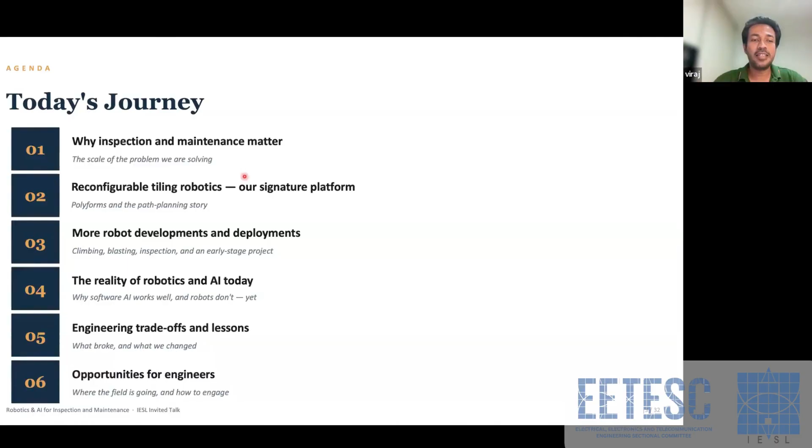Why do inspection and maintenance matter? Currently there are a lot of buildings and industrial infrastructure that require frequent maintenance and inspection. Globally, infrastructure maintenance expenses are more than a trillion dollars annually. Maintenance cost is almost 60 to 80% of the total life cycle cost of an industrial asset like a building or machinery.

Also, some of these maintenance tasks are high risk. For example, to inspect facades, people need to use ropes or gondolas to climb high-rise buildings and do the inspection task, but those are a bit dangerous and might lead to safety issues. On the other end, when inspecting something like a fuel tank of an aircraft, those are highly confined spaces, and it's very difficult for humans to go through and inspect them.

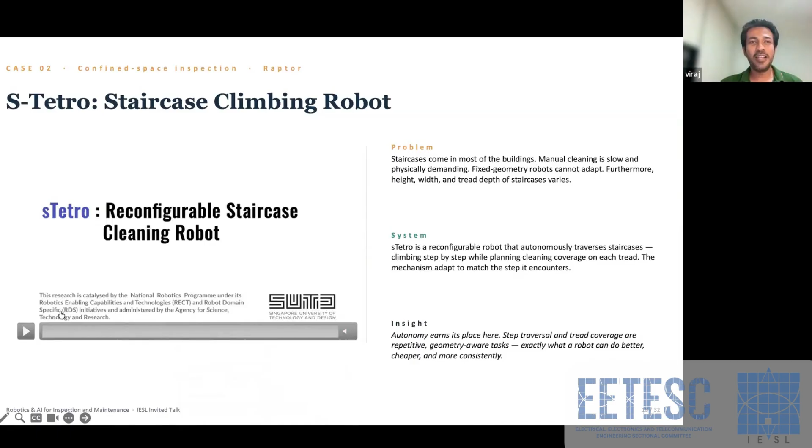sTetro is a staircase climbing robot. In every multi-story building, even if it has a lift, it will definitely have a staircase. Cleaning this staircase is also a problem because cleaners need to climb and clean each step. So we developed a robot called sTetro, a staircase climbing robot, initially intended for cleaning the staircase.

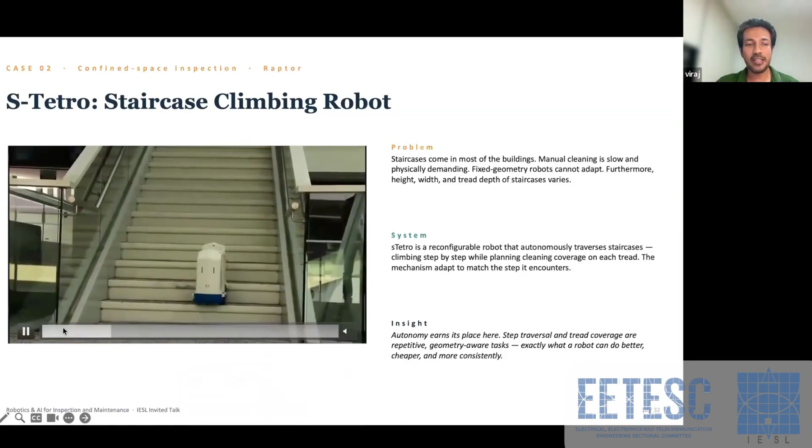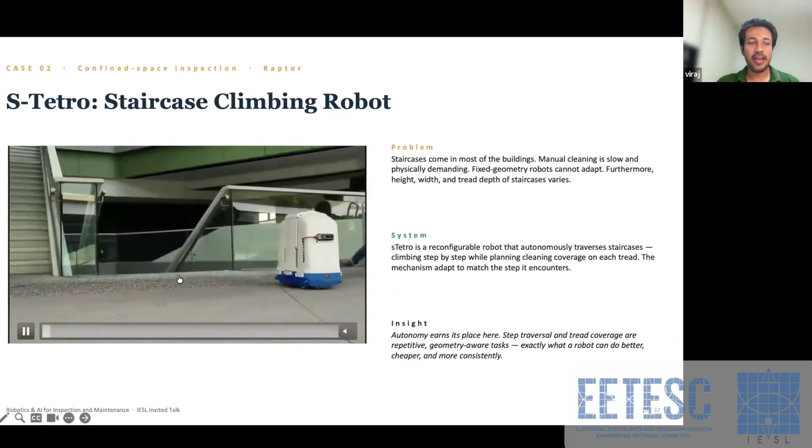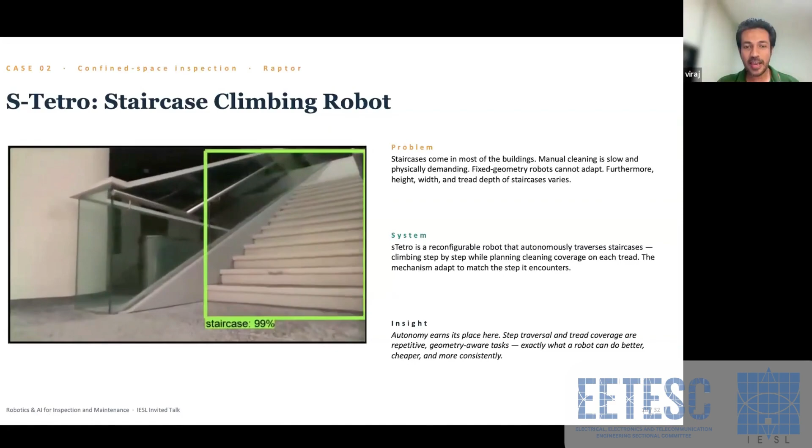It is embedded with a vision-based detection method, as you can see, it can identify the staircase using this method. After identifying the staircase, it detected the step height, riser height, and step size using its sensors. Then it used this reconfigurable mechanism to climb the staircase. As you can see, after climbing the first step, it does a sideways movement to clean it.

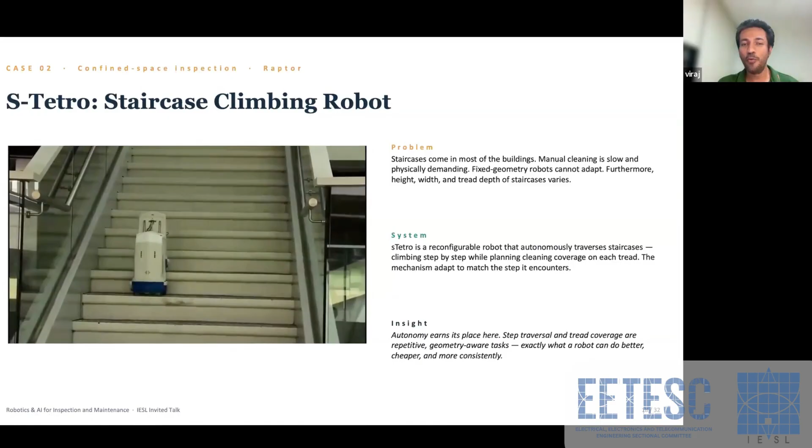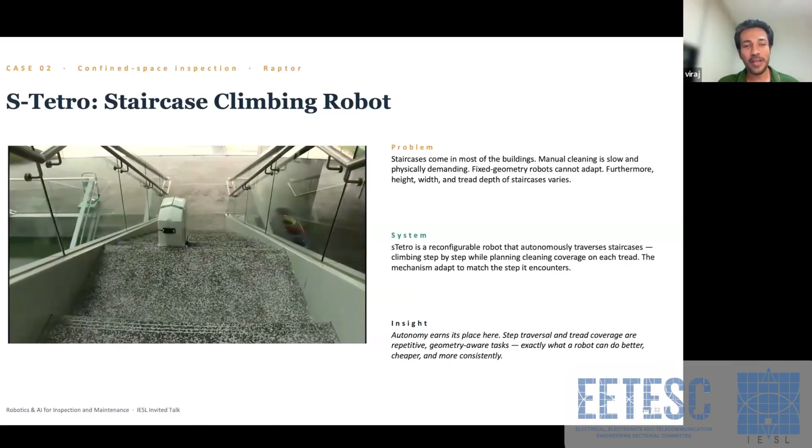It consists of 3 blocks. By changing, one block is on the first step, then the second block is lifted, then finally the third block, and likewise it can climb the staircase. This is another version - in the initial version it could only climb but not descend the staircase. This version can do both climbing and descending.

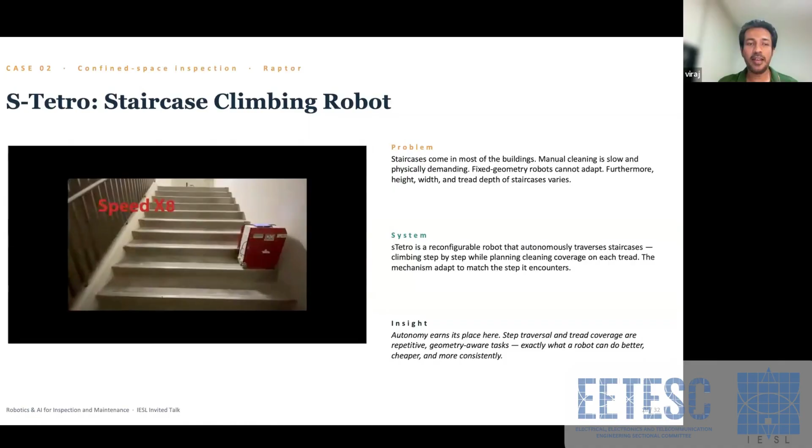These robots are equipped with LiDAR sensors which can detect the steps and measure the step size and riser size, then decide how much one block should lift and how much the other should move forward. Likewise, it can continuously descend and climb through these steps for cleaning applications.

Apart from cleaning, we have tried using these robots for goods carrying, especially in construction situations. For building maintenance, if we want to carry stuff to the top floor, using the normal passenger lift is sometimes difficult, so we tested how we can carry heavy loads using these kinds of robots.

The main insight is that for this kind of robot, the most important thing is that it needs to identify the steps clearly and change steps properly. Otherwise the robot might topple down, leading to dangerous situations like falling onto a human. So the AI and autonomy technology should be robust in detecting these steps and staircases properly.

We also need proper control algorithms that avoid toppling of the robot. So finally, the use of this kind of robot can improve cleaning efficiency and typical day-to-day building cleaning tasks.

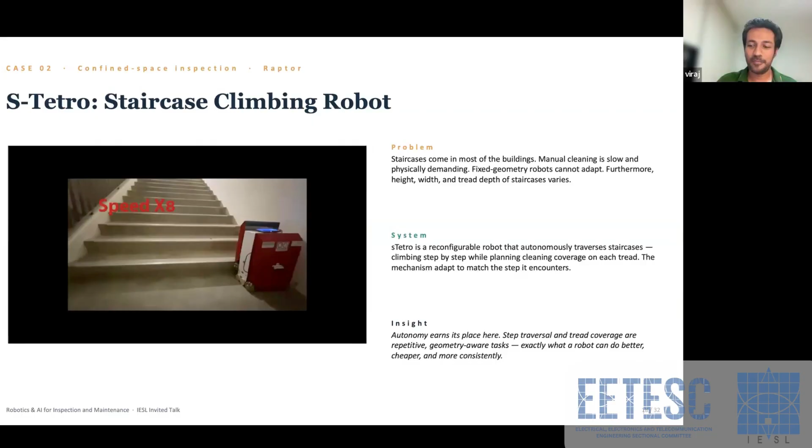I'm going to discuss some of our robot development targeted for high-rise facade inspection of buildings as well as aircraft fuselage inspections. We have developed several robots for inspecting surfaces where humans typically need to climb to do cleaning or inspection tasks. One drawback of human-based cleaning or inspection is safety, because humans need to climb through ropes or using gondolas, which is not safe. Also, finding labor is expensive and sometimes difficult.

So these robots, the first one we call Mantis. It is deployed for glass facade cleaning. This robot uses, as you can see here, three modules like this. Each module has a vacuum suction mechanism. Because of the vacuum suction mechanism, it can attach to the surface like this due to the vacuum pressure.

One of the main advantages of our robot over existing robots with a single module: if we use a single module robot, typically in a glass panel like this, we have separators based on aluminum or metal. Those separators have some thickness compared to the glass. So what happens is if we use a single block, it cannot move through this separator.

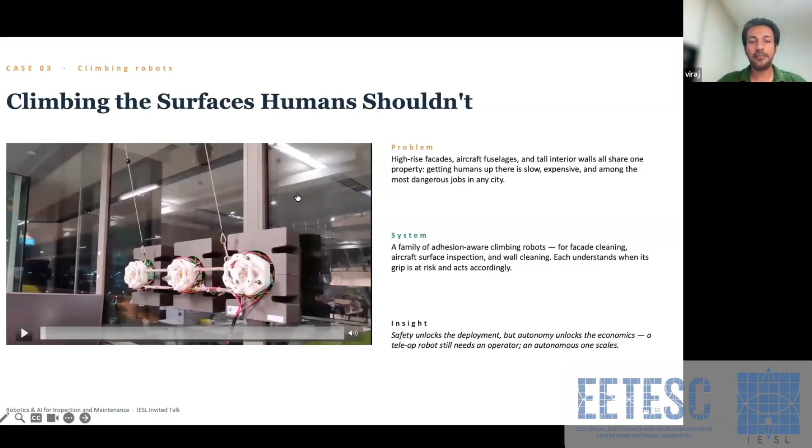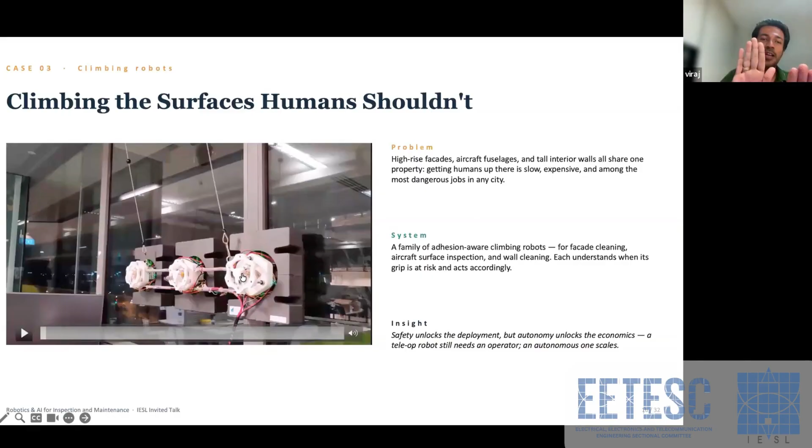So here we use this three module mechanism, where initially, when it's in a glass panel, all three modules are properly attached to the glass panel. When it encounters a separator like this, for the first module, we switch off the vacuum system and use a screw mechanism at the back of the robot to lift it. The other two blocks are still attached to the glass frame. Then these two robots start to move toward the right, so this one will pass through the separator, as you can see in this video.

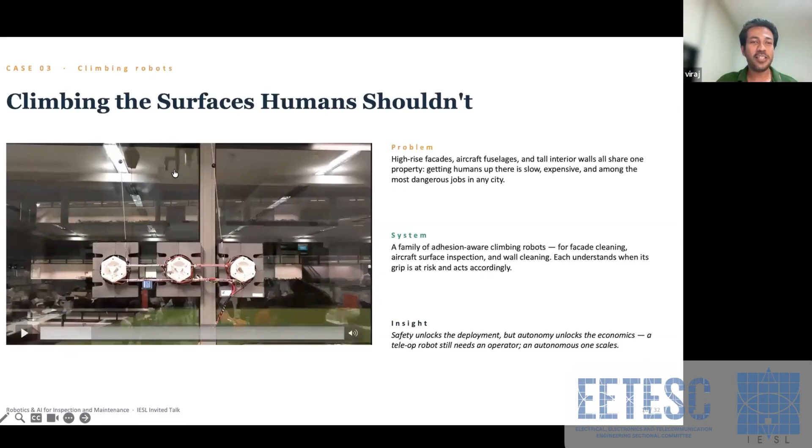Here please note that this robot is fully attached to the glass frame, and these two ropes are only for safety purposes. Even if we remove these ropes, the robot will still stay on the glass, but for safety regulations we have to always use safety ropes when using climbing robots.

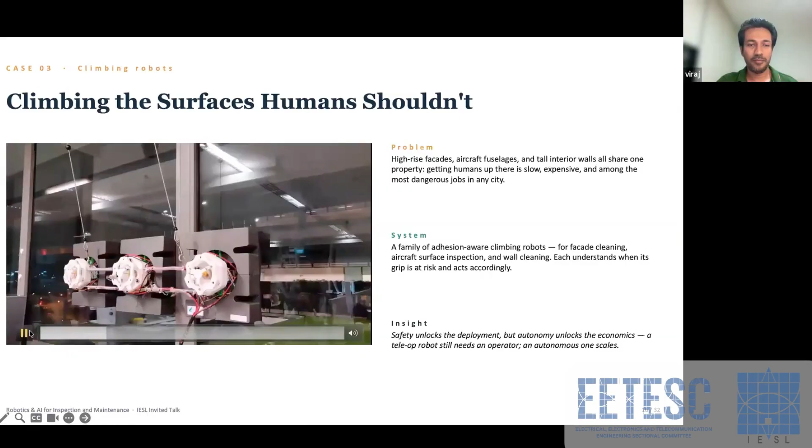As I have explained, now the second module moves to the next block and attaches to the glass panel. Then the third module will be moved. Likewise, we can use this mechanism to move, first cleaning one frame, then moving to the next frame and cleaning it, and so on. This way, we can use this robot to cover a large area, and it's also equipped with an AI-based method to identify the frame and make autonomous decisions for transitioning from one plane to another.

Here you can see an aircraft fuselage inspection robot. This robot's main advantage over other robots is that it has a reconfiguration mechanism, where it can change between two different planes. It can operate on the wings, and then move to the fuselage using this reconfiguration. We conducted this at one of the airbases in Singapore, and I cannot remember the exact model of this airplane.

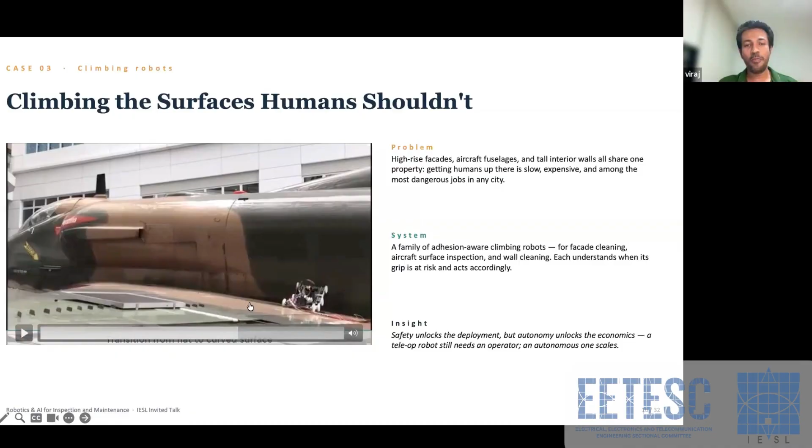As you can see here, this reconfiguration allows the robot to move from the wings to the fuselage, and then it can attach to the surface and climb on its own.

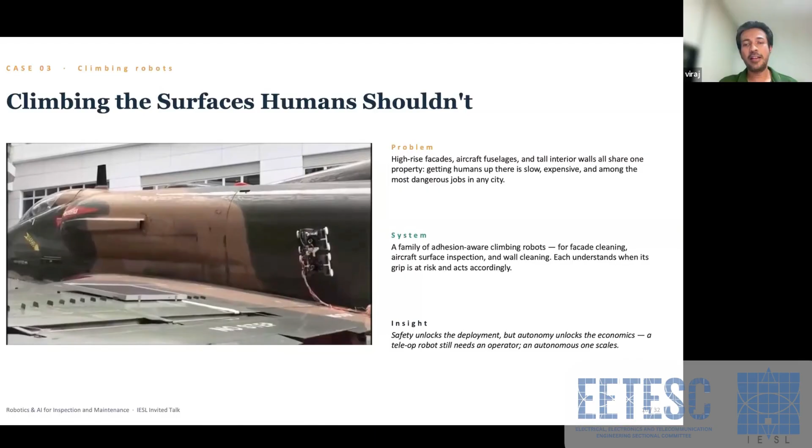We have developed vision-based inspection modules for these robots. As I recall, we used a YOLO-based aircraft crack detection method. We incorporated it with this robot, and after running the robot, we can identify where the scratches are on the surface of the aeroplane.

One of the main points to highlight is that safety is critical for this climbing robot. But the problem is, if we try to ensure safety, autonomy sometimes has reliability issues, so people use teleoperation instead. Some of these systems are teleoperated too. But the problem is if we want to scale, we cannot always have a person operating these robots, so we need an autonomous system that can automatically decide, take actions, and if it's losing adhesion, autonomously identify that and take safety actions. Therefore, autonomy is essential for scaling this.

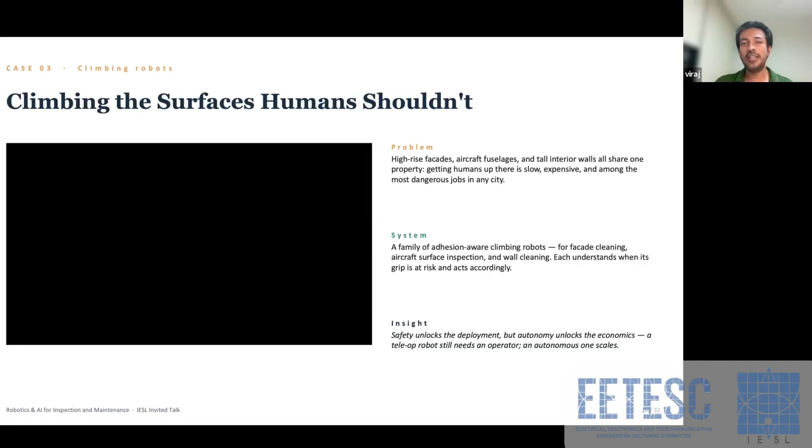So we have developed methods that can identify if there is a vacuum leakage, and if there's a vacuum leakage, there is a risk of falling. We have developed such methods for identifying vacuum leakages and taking precautionary actions in the robot's operation.

Okay, the next one is another type of climbing robot. This one we developed for ship hull maintenance. Typically, when ships are at sea for months, there will be biofouling and sometimes corrosion. So after several months at sea, they take it to docks and remove that biofouling and also strip paint using hydroblasting and sand blasting.

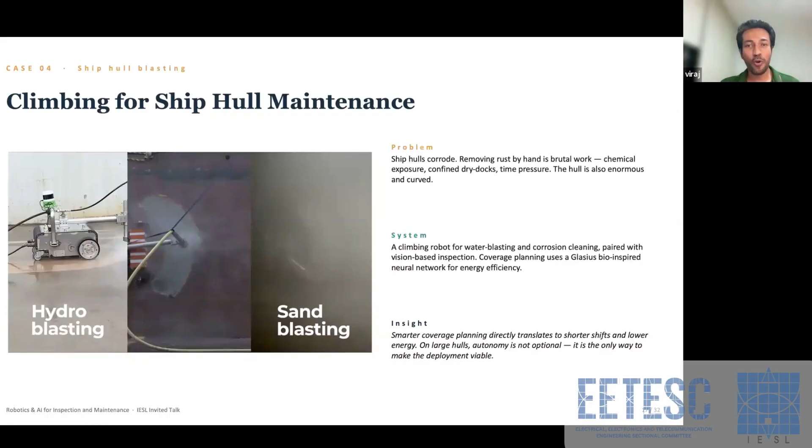This robot we call the hydroblasting robot for ship hull maintenance. So you can see the video.

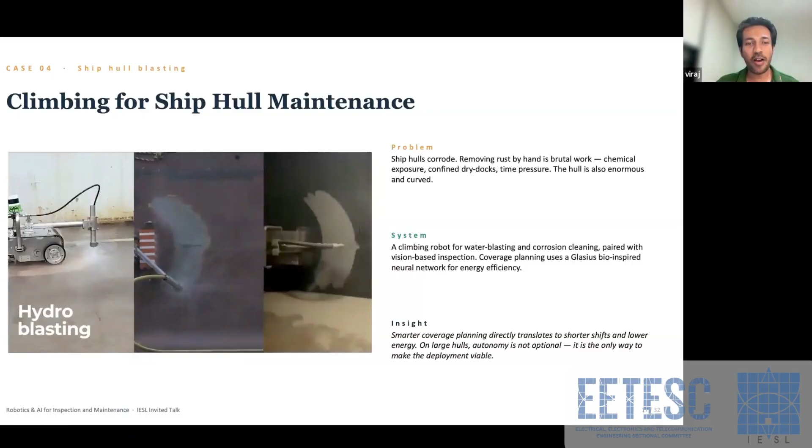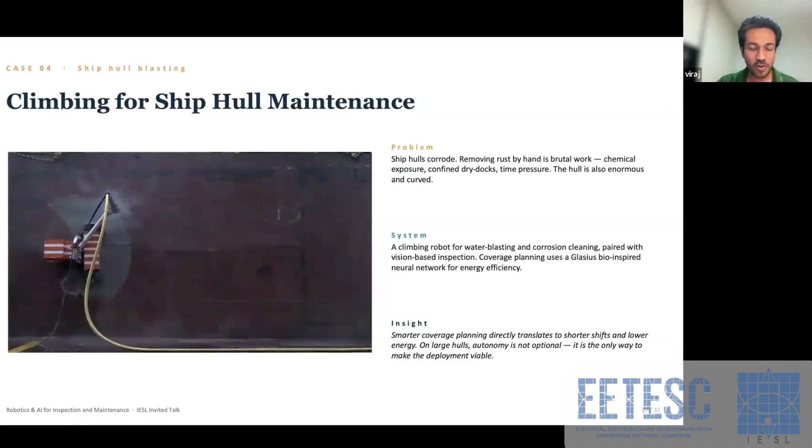So this is hydroblasting. We have a high pressure hydroblasting device fixed to the robotic arm, and here you can see paint removal in one of the dockyards, I think Tuas dockyard in Singapore. So this is the situation of biofouling in a real ship, and this is the ship surface.

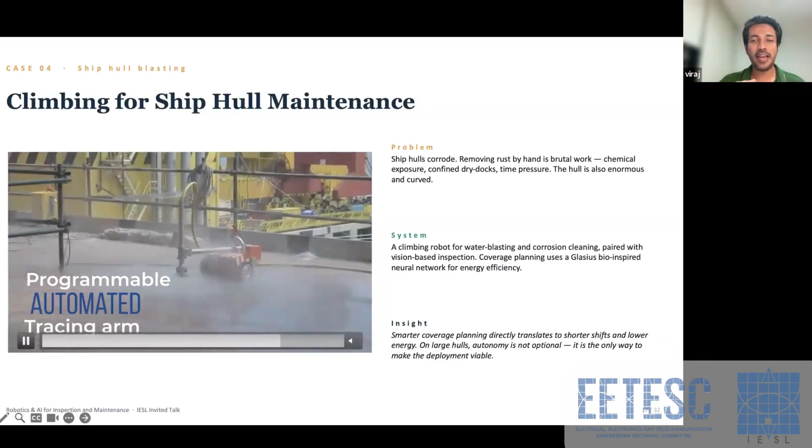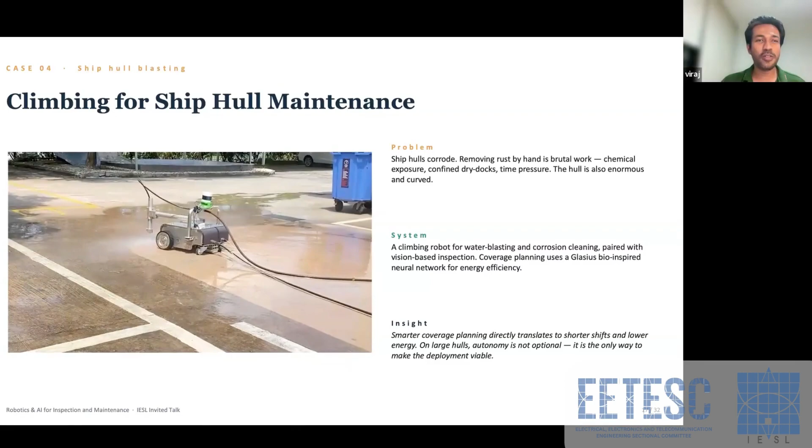So we use a magnet based on neodymium in the wheels of the robot. This magnetic adhesion helps us attach the robot to the ship surface. In the previous climbing robots I explained, we used vacuum suction or thrusters. But the main problem is, if we use vacuum for these kinds of robots, and with hydroblasting, if we blast sand or water in this way, there will be repulsive forces in this direction, and typically the vacuum attachment might not be sufficient for stability.

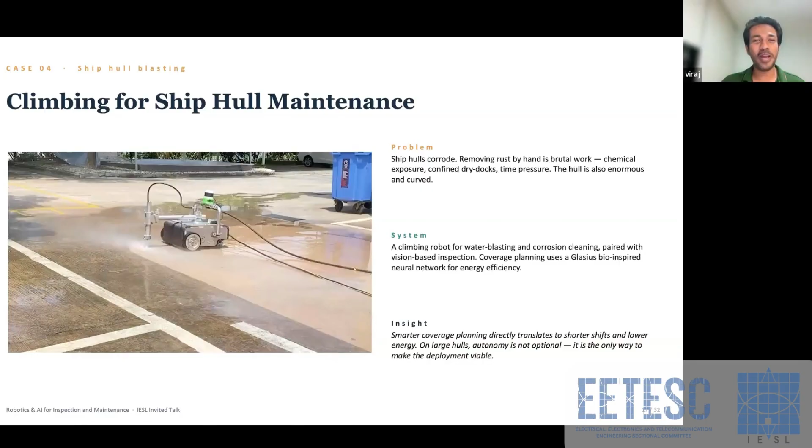And the other thing is, ship hulls are made from iron, which is a very good ferromagnetic material. So in the wheels of this robot, we use magnets, which allow us to attach the robot to the ship surface, and then we have this robotic arm that can move like this.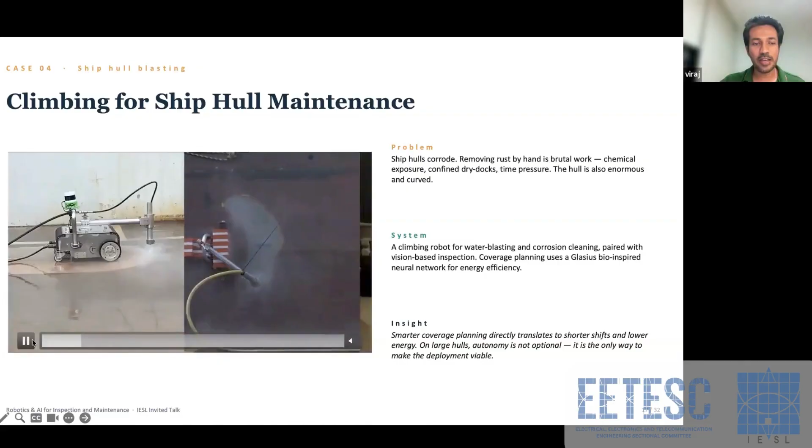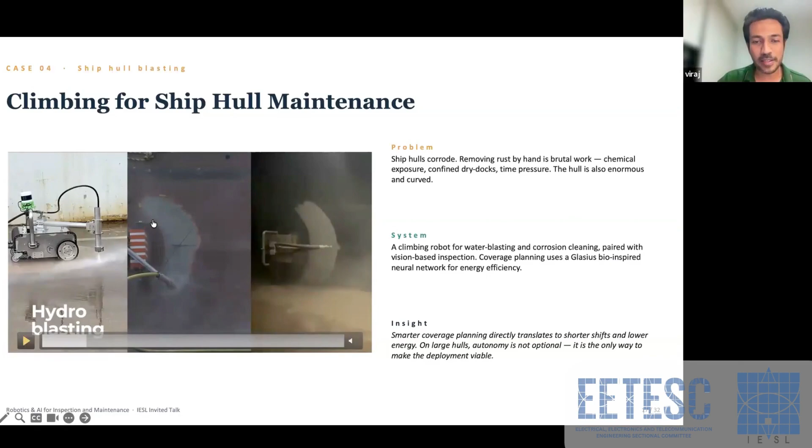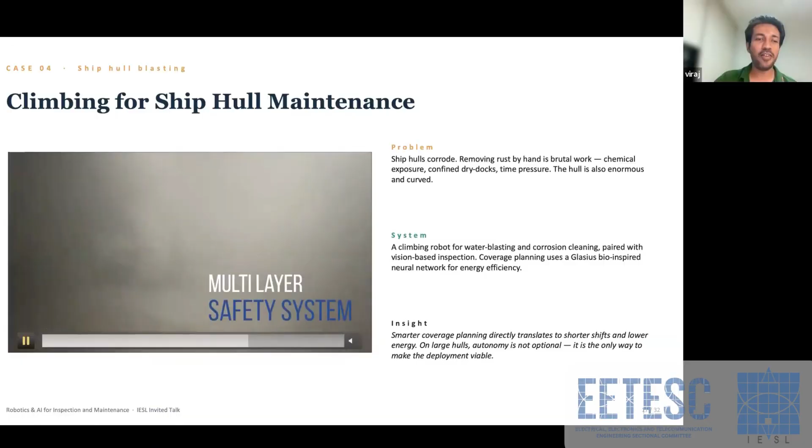The robot will move forward and then in a zigzag pattern to cover the area for blasting. We have also tested it for sand blasting, which, as you can see here, is a very tedious, unhealthy and risky task for human labor.

They need to wear PPEs, and those sand particles pose a high health hazard. So the use of these kinds of robots can reduce the risk of health hazards, as well as improve efficiency, because these robots are equipped with AI based methods. For example, when the robot is doing hydroblasting for corrosion removal, we have developed a method that can self-evaluate whether the corrosion is completely removed or not. If it is not removed, it does the hydroblasting a bit more to completely remove it.

One of the main important things for this robot is we need to ensure that everywhere is properly blasted, meaning we have to ensure coverage of the surface. Compared to a cleaning application in a home, that surface is much more flat. But if we consider a ship hull, it is a vertical shape with some slanted arrangement.

So we have to formulate energy efficient methods for the coverage, and therefore autonomy and energy efficiency planning are essential, because nobody will use a robot that uses twice the energy of a human. Also, a ship hull is a very large surface, so the robot needs to do the coverage efficiently within a given time period.

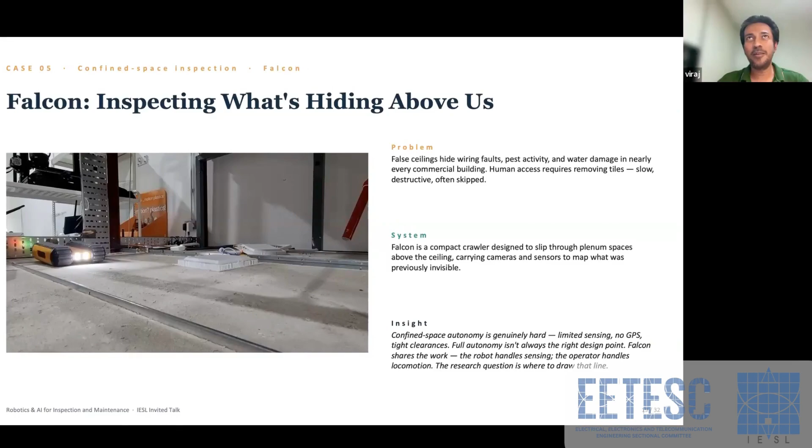So the next robot development is about false ceilings. False ceilings are everywhere—you can find them in office buildings and shopping malls. One of the problems with false ceilings is that all the building infrastructure goes through them, like electrical cabling, HVAC systems, pipes, fire systems, water pipes, and those kinds of things.

The other problem is it's not possible for a human to climb through there, because these are hanging with cables. Also, sometimes rodents may have already damaged the wires, which could lead to electrocution if somebody tries to access these surfaces.

Before initiating this development, the inspection process in Singapore was done by people removing one block, putting their head inside, using a torch to see the surroundings, then opening another place and climbing in to look from the inside. They do the inspection this way, but we require routine inspection because there can be water leakages. If there is a water leakage inside for a long duration, maybe one or two months, these hardboard sheets might get damaged, and we wouldn't know until it collapses.

The other issues can be rodents, which might cause problems for kitchens and food courts, and also damages to fire systems and alarm systems. So we have developed this robot called Falcon.

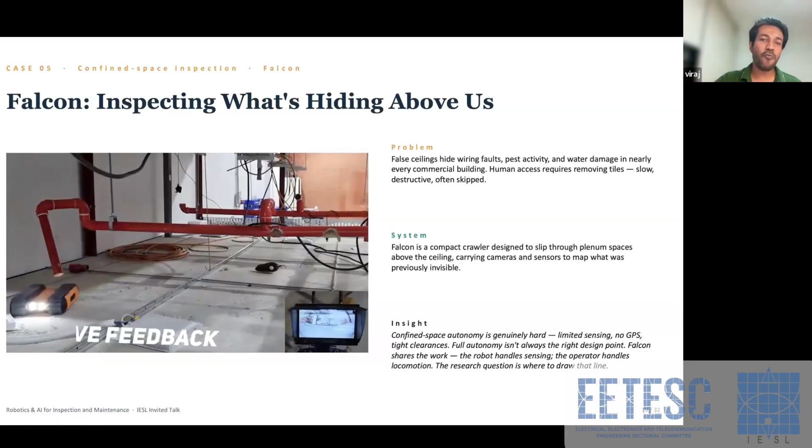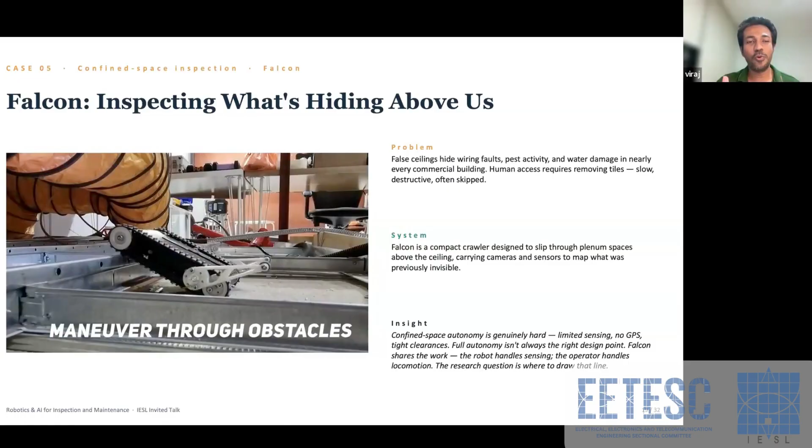Its form factor is very small, and the main advantage is this is a mock setup of a false ceiling. It can climb through these bars which are used to connect these kinds of things, and it can also climb through these bars and go through wires, because typically inside the environment is unstructured.

The main problem we face is that since this environment is very confined and also unstructured, it's a very complex task to establish autonomy because we don't have much sensing. Sensing is limited, and GPS is not possible for this kind of indoor application. So in this situation, we didn't go with full autonomy.

We developed it with some shared autonomy where we use an interface with a screen where the user can see where the robot is and operate its direction of movement. So what the autonomy does is identify if there's a leakage and where its location is - that kind of identification is done by the autonomy, but some decision making is taken by the humans.

So here we argue that instead of going with a fully autonomous system, we thought of going with a semi-autonomous, shared autonomy system where the robot handles the sensors and some localized navigation tasks, but other tasks like moving directions are handled via teleoperation by the human.

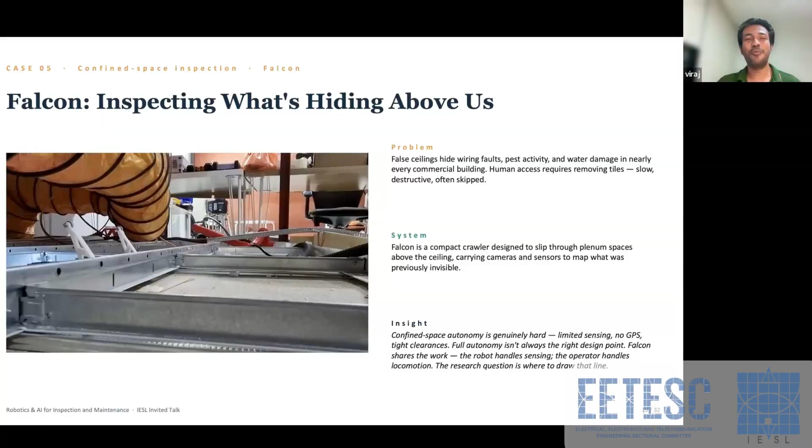This kind of situation is also worthwhile because it is very difficult for a human to open like 10 places inside a room and climb through a ladder to inspect. Instead, a person can climb just one time, put the robot inside, and operate it to inspect the whole environment.

Then the next development was about the Panthera robot. This is an outdoor sweeping robot.

If we consider parks and roadside pavements, there's a lot of cleaning requirement. Daily there will be litter like leaves from trees, sometimes water bottles, polythene - likewise there can be so much litter. Currently human cleaners do this manual cleaning process, but doing the cleaning task outdoors in daytime is a little difficult and time consuming. Therefore, we thought of developing this robot called Panthera.

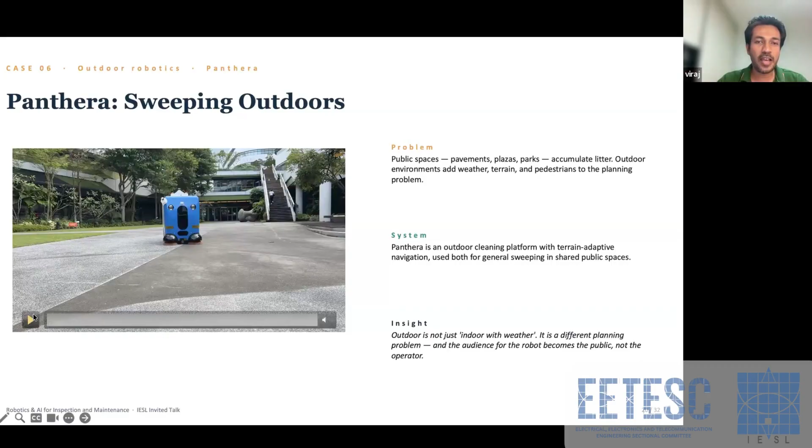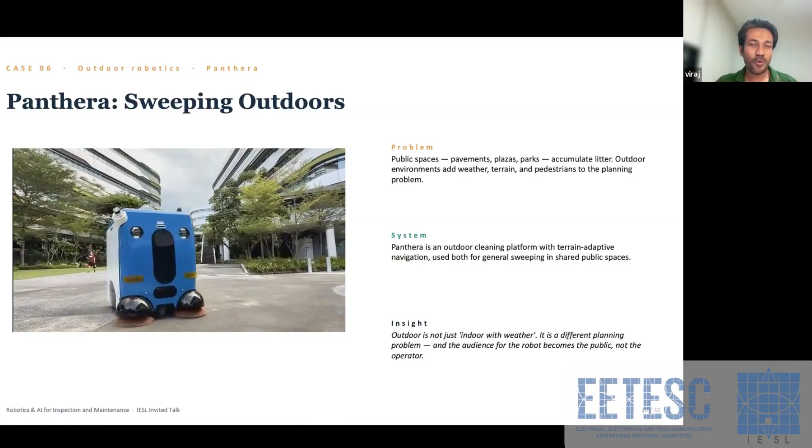This is an outdoor sweeping robot. As you can see, the robot's weight and size are fairly high, almost half the size of a car, and it's equipped with multiple LiDAR sensors, depth cameras, and sonar sensors.

Then there's a brake light, because in Singapore, this kind of large robot is considered an autonomous vehicle. So we need to have brake lights, signal lights, and those kinds of things also.

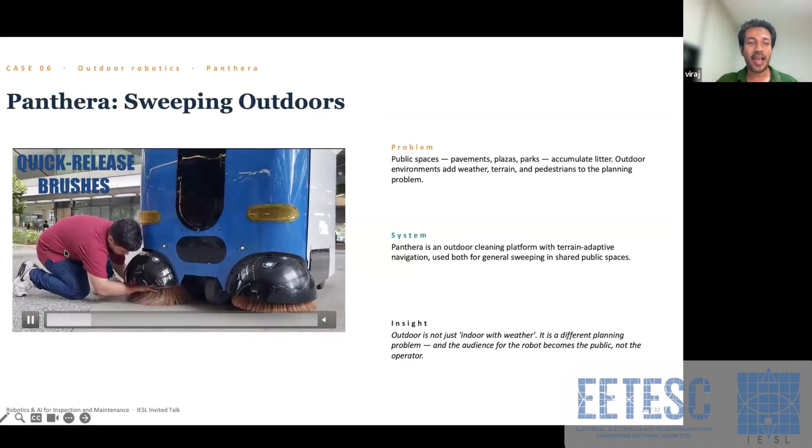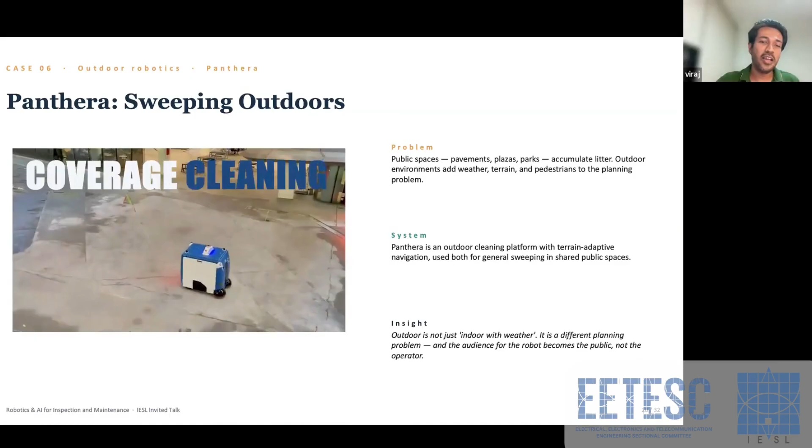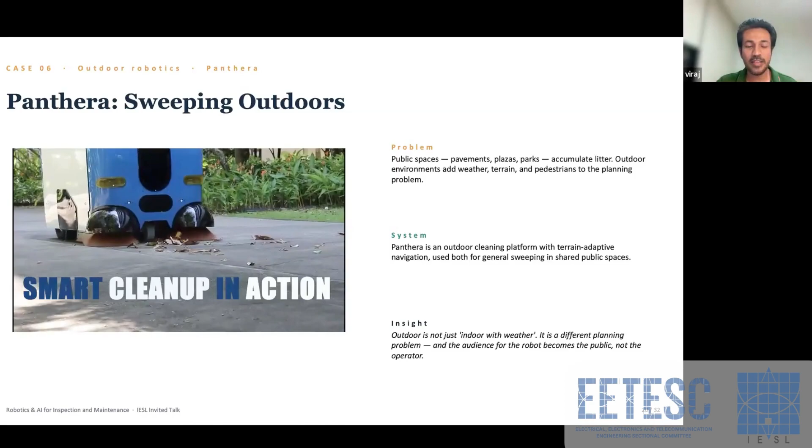As you can see here, the front has two brushes which we can remove and detach, then those can be grounded, and this does the cleaning coverage. While doing so, if there are humans, it can avoid them and continue the coverage. Here you can see the path planning happening inside the software, and here you can see some cleaning.

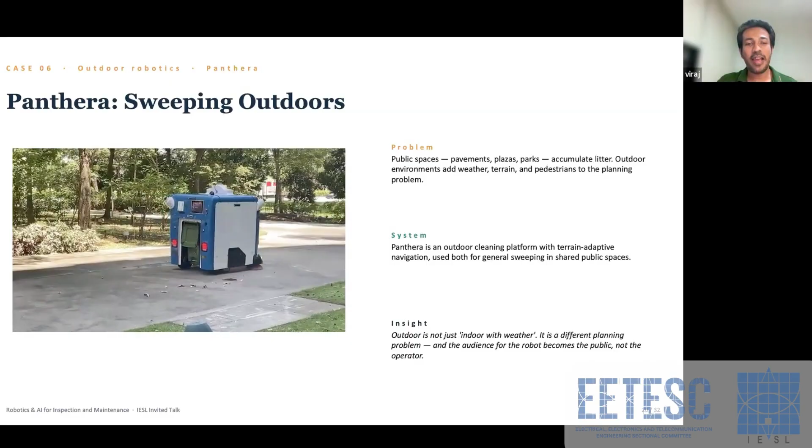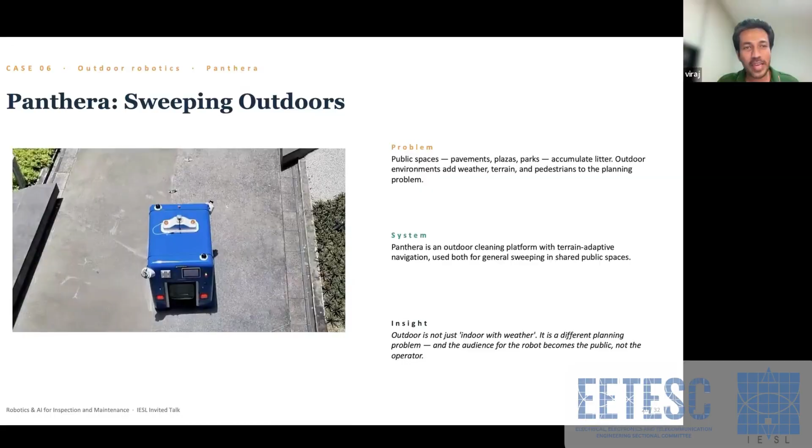We've equipped it with different sensors to detect what kind of leaves are there. If identified as wet leaves, the algorithm increases the vacuum power in the middle to suck those things up a bit more. We also adjust the brush speed based on the objects encountered. As you can see, we've tested this in different wet settings.

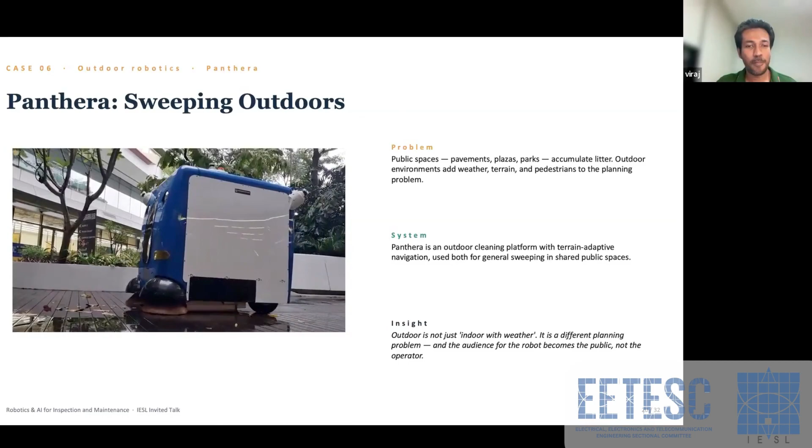In front, it has two brushes like this. In the middle, it has a roller and a vacuum mechanism. It can also avoid humans.

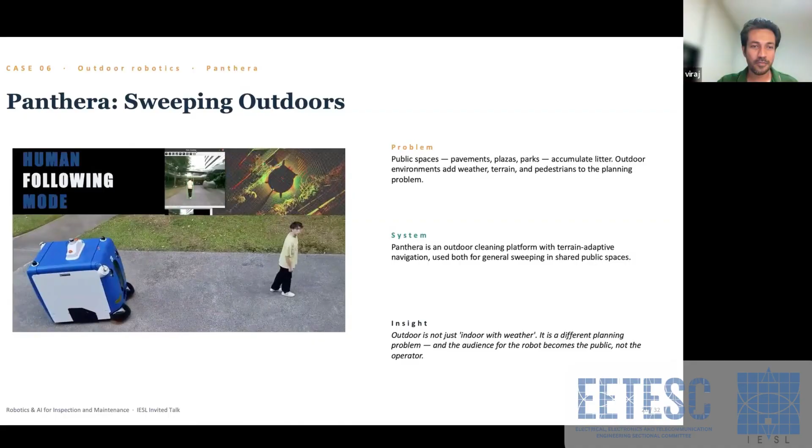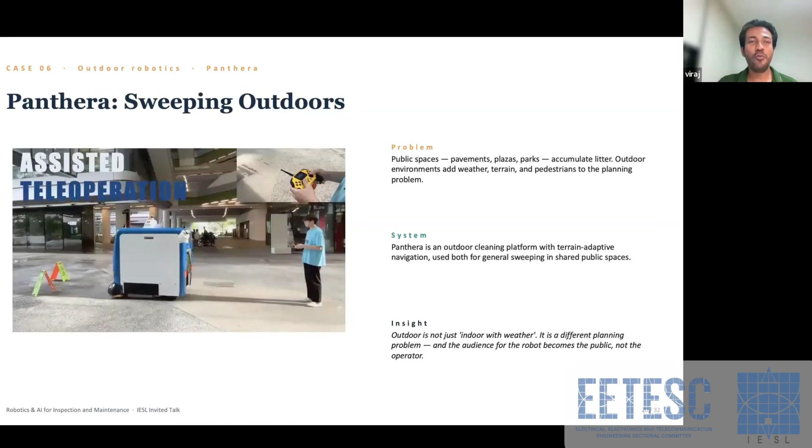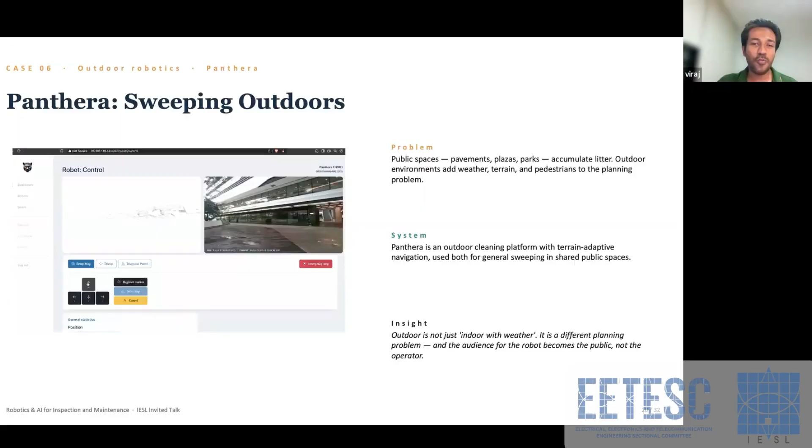When we discussed with some cleaning staff, they suggested that when moving the robot from one place to another, instead of operating through a joystick, it's easier for them if we make it follow that person. So we've done that, and we've also developed a cloud-based inspection system, meaning the robot can be monitored from a far away location.

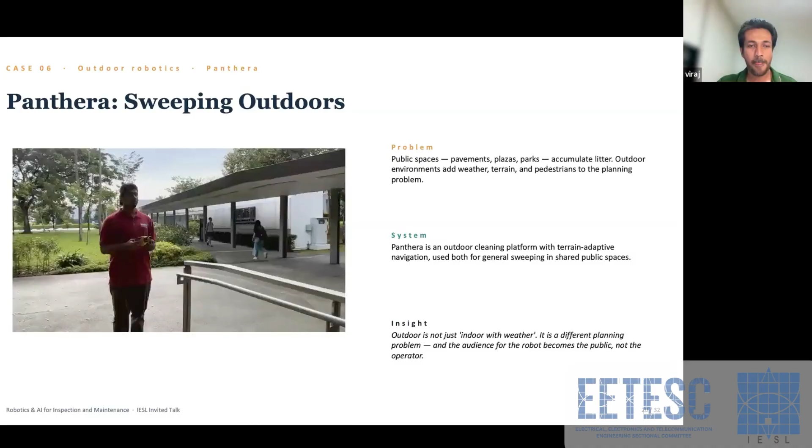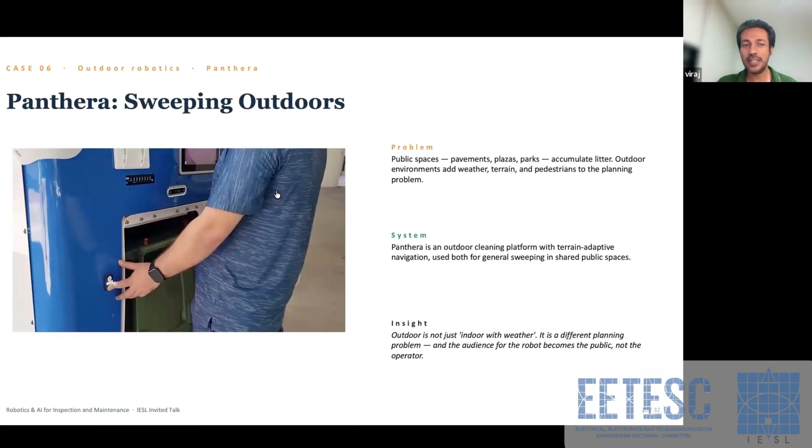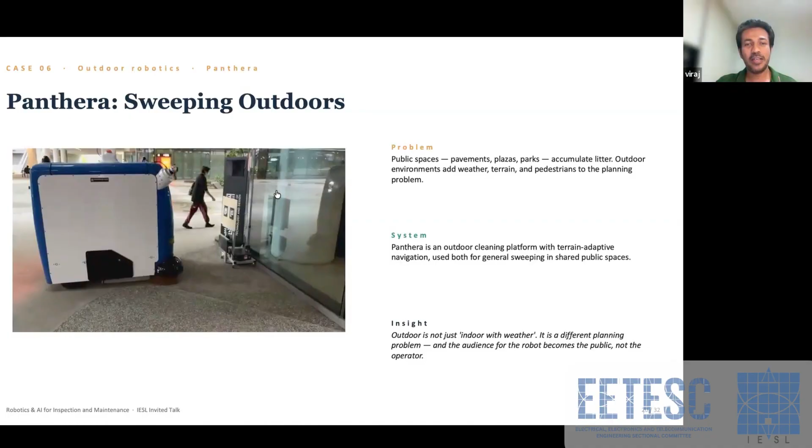This robot is fitted with a standard 120-liter bin. As you can see, we can lower the bin and remove it once it's full. It also has autonomous docking facility for charging.

When we move from indoor to outdoor, it's not just a change in weather condition, it changes the whole thing into a new dimension. In outdoor settings there can be a lot of people. For example, when cleaning in a park, apart from pedestrians who walk, there can be cyclists who move very fast, and the audience is also different. On the roadside, there can be other vehicles. So autonomy and decision making should be more stable and more safety directed.

For example, if somebody comes in front of the robot within less than 0.8 meter or so, regulation says the robot needs to immediately stop, and the distance between the person and the robot should be more than some threshold value. Otherwise we cannot deploy it in public space, because this robot is large, enough to be the size of a vehicle. I can't remember the exact weight, close to maybe 500 or 600 kgs.

So we have to have new algorithms useful for outdoor settings, and also in rain conditions. Once we did a field trial in a park and it suddenly started to rain. What happens is with the rain, LiDAR sensors get issues detecting, because they start to detect rain particles as obstacles. So the robot should move to the side, and we need algorithms to autonomously make the robot go and stop until the rain ends.

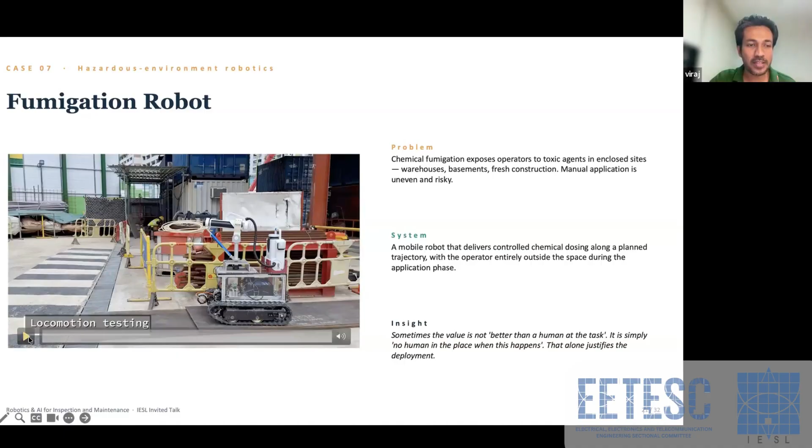So we developed a robotic system, especially for construction sites, with a track-based mechanism and a fumigation unit that can move through uneven terrain and do the fumigation task. We named it Wombat. It can do misting and fumigation.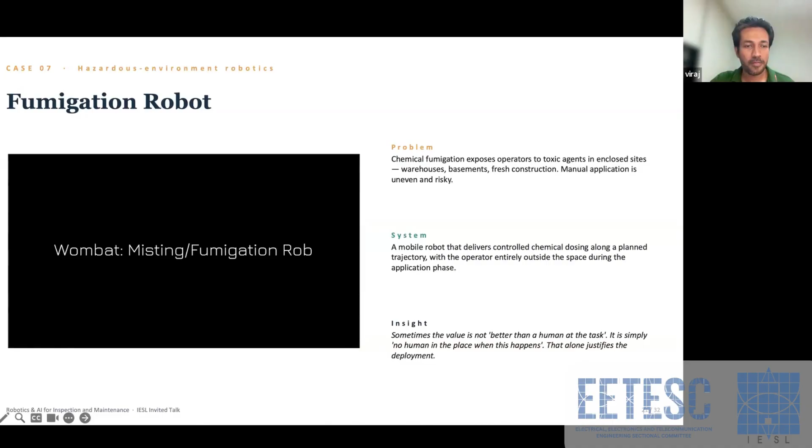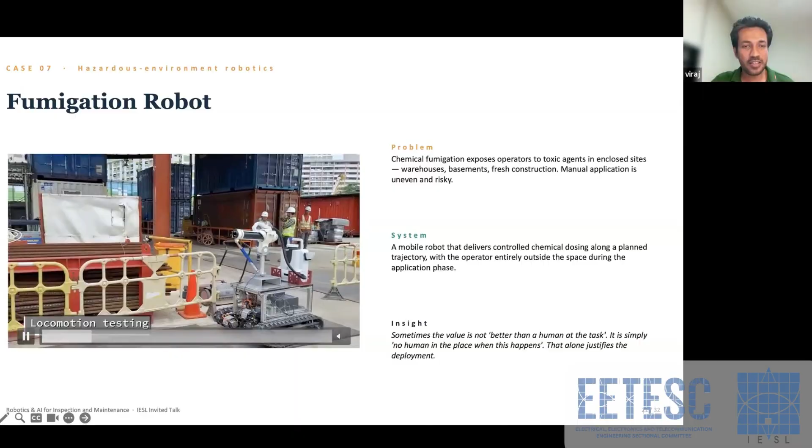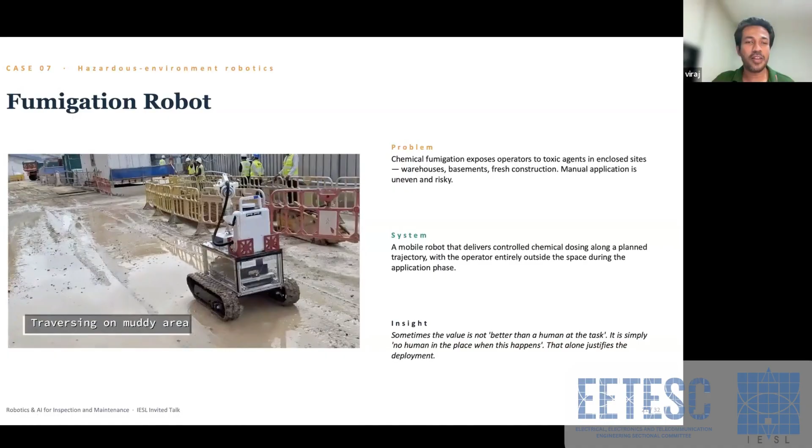This was done at a construction site in Singapore. First we can see testing of the locomotion mechanism, because we use a track mechanism. If we consider a real construction site, it has mud, gravel, and bumps the robot needs to go through, including damp gravel, and it should be able to handle that.

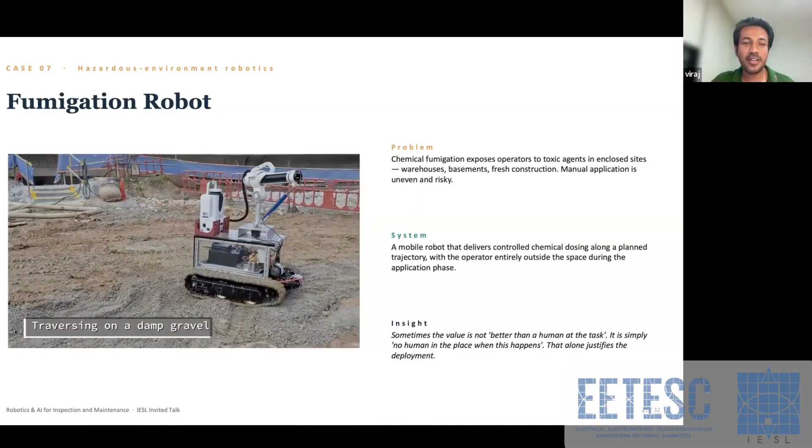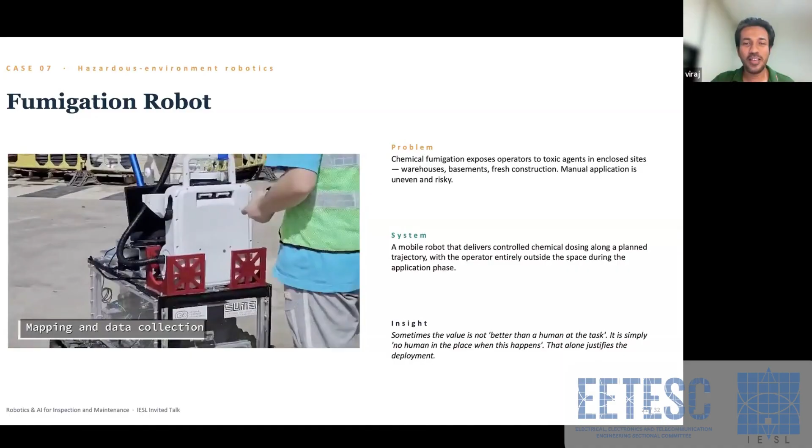Now you can see the misting unit is activated, it rotates and does the misting. Due to some regulation issues, we haven't used the actual fumigation agent; here we are only using water.

In this kind of application, sometimes the robot doesn't need to be fully autonomous. Sometimes making it a teleoperated robot, operated from a faraway place, is sufficient, because it avoids exposing the operator to hazardous chemicals.

This is some ongoing work. We have developed a robot for a gardening application. You know that for small saplings of vine-like plants, we need to use a stick and stake the plant to it. One problem is when we use a robot to grab the plant and move it toward the stick, using another arm to clip it, the robot needs to grab it at the proper location with the proper force, otherwise it will damage the plant.

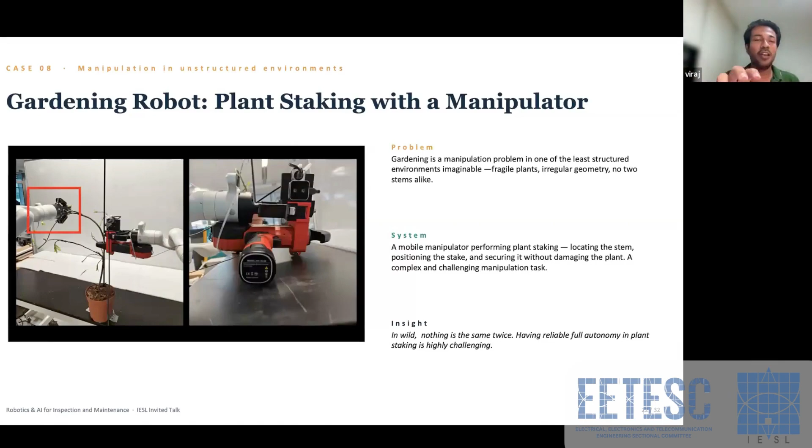Predicting the plant's behavior is very difficult because it has deformation properties. When we touch it from one end, we need to predict how the other end deforms. We developed a belief-based method for this.

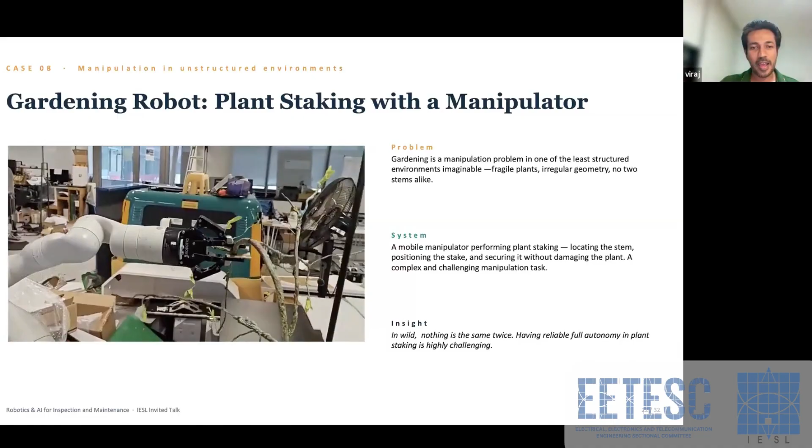Here you can see we have only done laboratory experiments for this. One robot arm grabs the plant and moves it toward the stick, while the other robot arm moves the staking device, then stakes it.

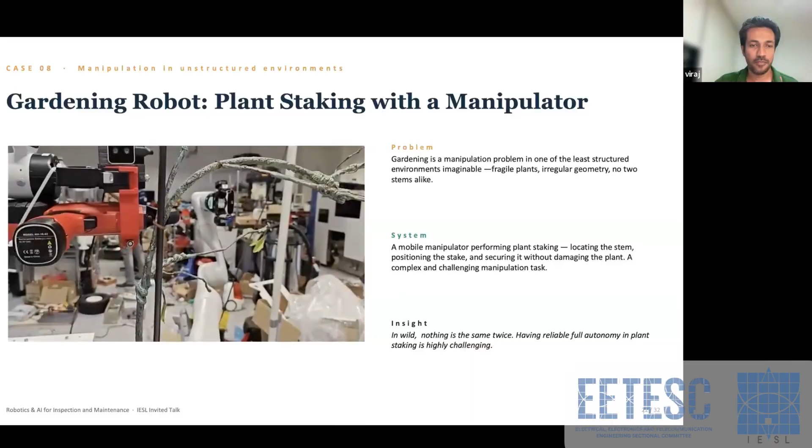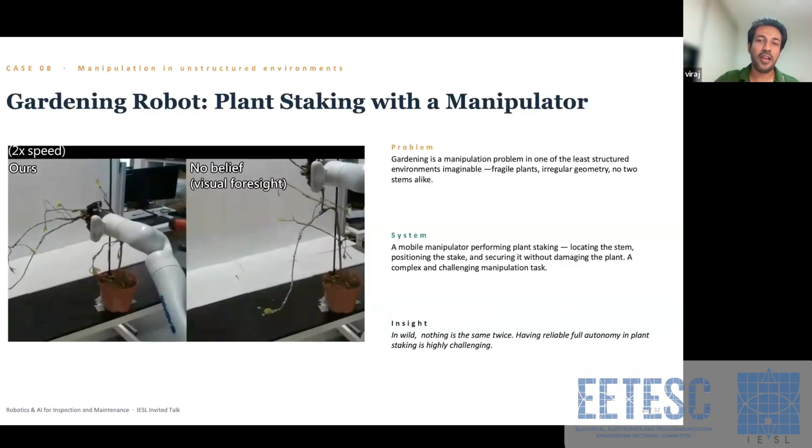So we have a benchmark with an existing algorithm and our own. Our one can properly do this, but without belief, it might grab from a different location. Now you can see on the right side, it misses the proper attachment to the stake.

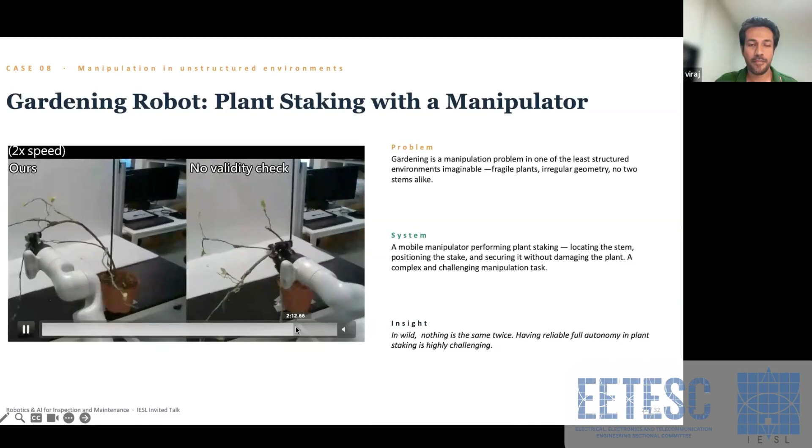So the pot was lifted, and in that case, too much force might damage the roots of the plant.

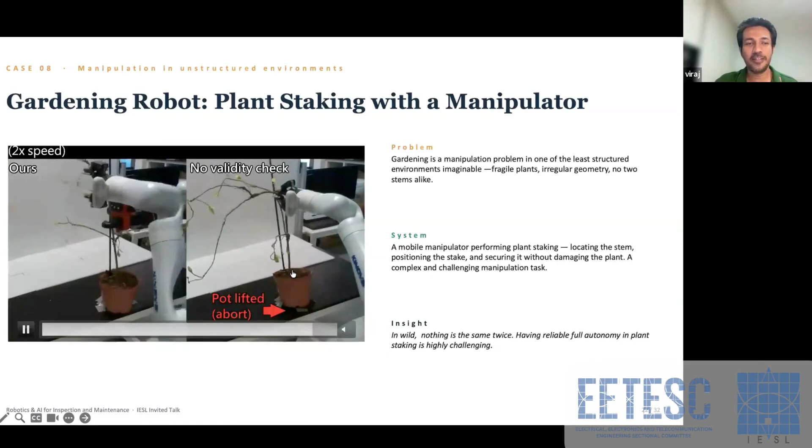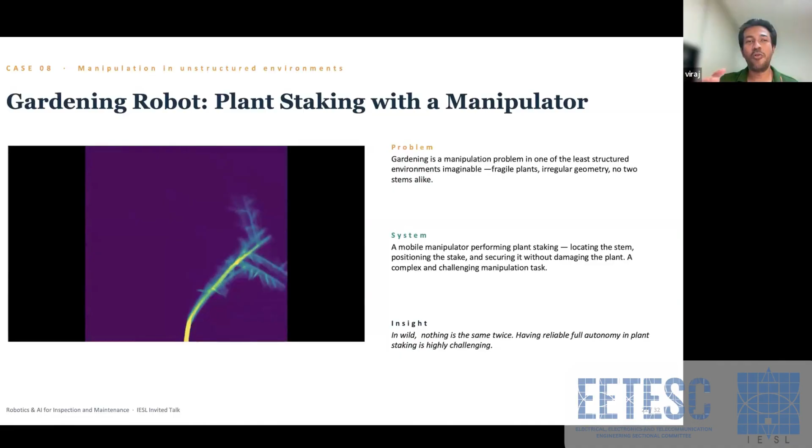So the main problem of having autonomy for this kind of thing in wild situations, like plants, is that you cannot see the same object twice. Each object is unique, so we need good models that can replicate the behavior of those things. It's the most difficult and challenging task. If we can model these plants and their behavior to the full extent, then we can have good, reliable autonomy.

This is a project I'm currently working on. We are developing a housekeeping robot using vision language models. Hotels are everywhere, in Singapore, Sri Lanka, maybe Thailand. After guests leave, hotel staff need to make the room ready within a limited time period, maybe within 30 minutes they need to make the bed. One of the issues is health concerns like back injuries, which are common. So we are currently in the process of developing a hotel housekeeping robot for bed making.

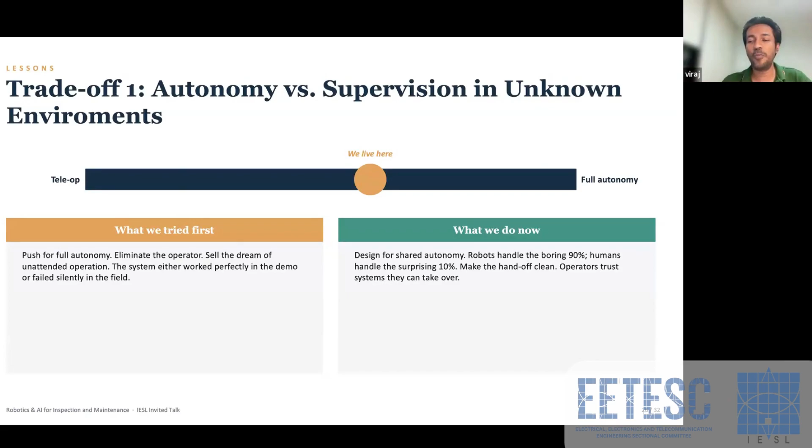Another trade-off is how we develop robotic systems. Typically everybody likes to have a robot that can perform all tasks. For example, for our home, let's say we have a robot that can do cleaning, cooking, and washing. But let's say that robot does every task only at maybe 80% accuracy or reliability - cleaning at 80% with some things still left, cooking not properly done at only 80%, and washing also at 80%. But people do not prefer that kind of system which only does 80%.

So at the current situation, people are mainly preferring task-specific development. We can develop a robot to have cleaning efficiency of maybe over 95%, cooking maybe 95%, and washing maybe 95%. People like to use 3 different robots if those robots can do maybe 99% accuracy and reliability. If a robot does those three different tasks with 99% reliability, people will go with that way, not with a single robot that performs 80% for each task. So generality is not the way - we do not need to consider a generalized, general purpose robot for all goals. For some applications, we need a dedicated robot, which will be sufficient and also more reliable.

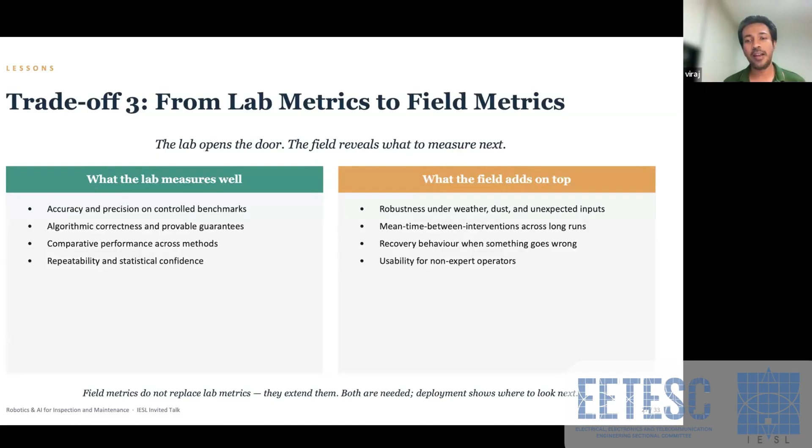Finally, we need to integrate these robotic systems with human workflow. Even though we have developed a good robotic system, we need to integrate it with the existing workflow. For example, if there's a building maintenance task, there's an existing protocol for how human workers do that task. So when we integrate a robot, we need to have a smooth flow in that task.

We cannot just remove some people and put in the robot, because the flow should be smooth. For example, let's say there's a cleaning team who do the cleaning, and we replace this team with a robot. But that cleaning team doesn't have any expert to do the robot maintenance task, even a small task. In that case, it might lead to failure, because if the robot fails due to a small issue, nobody is there to fix it.

Also, our design should target the operator, not the engineer who built it. For example, when we develop a robot in the laboratory, to run the robot we sometimes have to run two or three scripts in Linux. But in real deployment, we need to use more intuitive interfaces which are easily readable by non-experts.

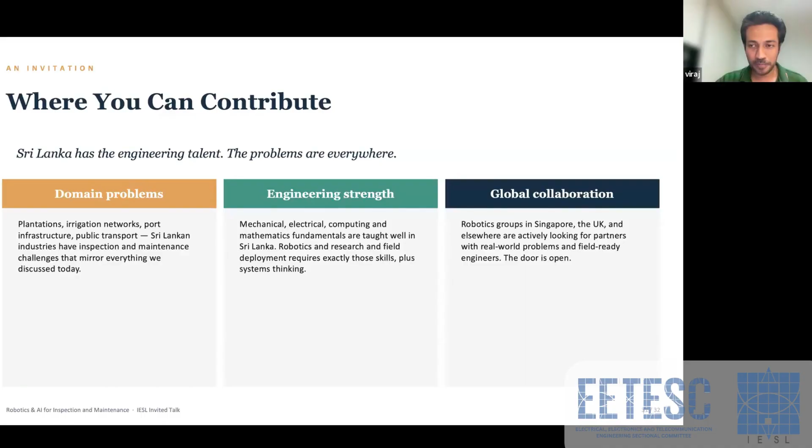Robotics groups here in Singapore, and also in the UK and other countries, are looking for partners. Sometimes we can collaborate to solve these kinds of real world problems. So there are a lot of opportunities within Sri Lanka to contribute to maintenance and inspection tasks and improve their reliability using robotics and AI systems.

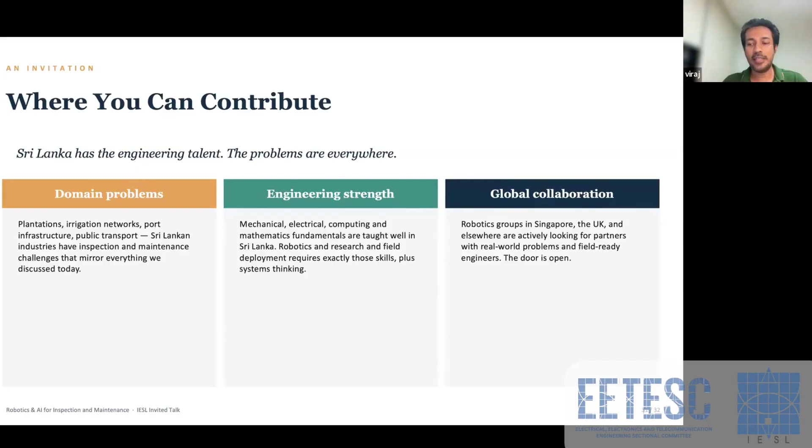So with this final takeaway, I will end my presentation.